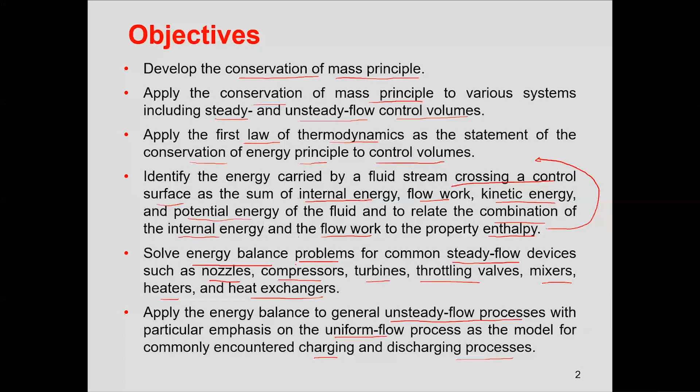So let's move on and try to understand the conservation of mass principle. It says that mass, like energy, is a conserved property. Just like energy, it cannot be created or destroyed.

Mass is a conserved property. We'll see the specific case where we see interrelationship of mass and energy, but this is the reality that mass, just like energy, is a conserved property. For closed systems, you are not interested in mass balance.

Before that, it says that if you have 2 kgs of hydrogen and 16 kg of oxygen gas and they react together to form water, they will form water having a specific weight of 18 kgs. It is not possible that you react 2 kg of hydrogen with 16 kg of oxygen and end up having 20 kg of water, or rather 15 kg or 13 kg of water.

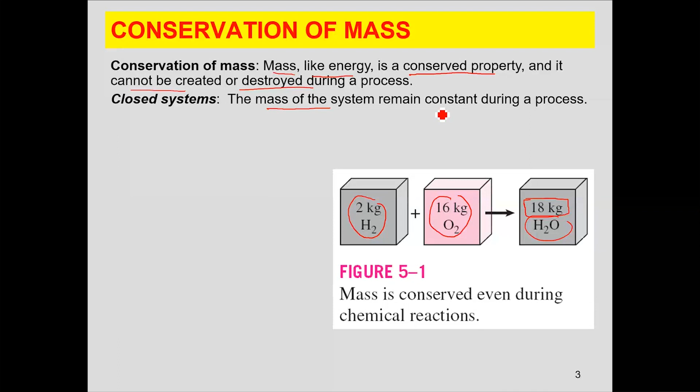Rather, there is a sense of mass balance associated with the process. You cannot have a process with mass being destroyed or created, unless there are some other reactions. I'll come to that in a minute's time. Specific reactions. So for a closed system, again, we are not interested in the mass balance because the mass of the system essentially remains constant during the process. So mass balance equation is not an issue.

Excuse me. So a mass balance equation is not a problem for closed systems, since the mass essentially remains constant. For open systems or control volumes, mass can cross the boundaries, and therefore we must keep track of the amount of mass that is entering or leaving the control volume. That would determine how much mass gets associated with the control volume.

The all-time famous equation that relates mass and energy is E equals mc squared, where energy is related to mass as a product of the square of the speed of light, which is roughly 3 into 10 to the power 8. This equation, where mass is converting into energy, is more often used with nuclear reactions where the smallest change in mass could result in a tremendous amount of energy, since it is multiplied by the square of 3 into 10 raised to power 8. So you know how big the value of energy could become for a small change in mass.

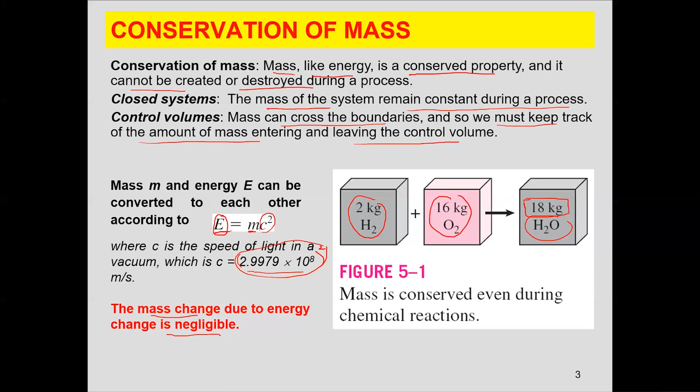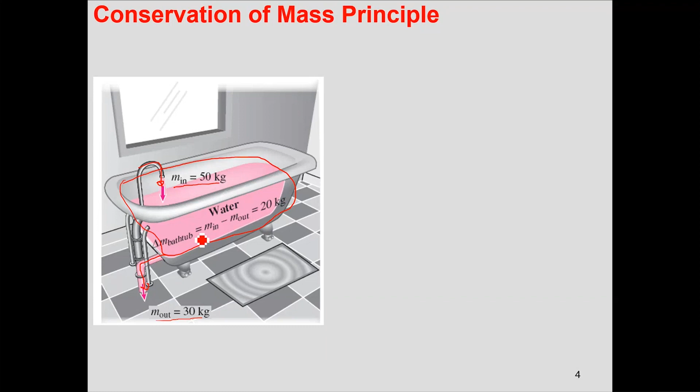The conservation of mass principle: if you have this bathtub as your control volume, and you have mass flowing into the system, and there is a drain where the mass is flowing out of the system. So the mass coming into the system is 50 kgs and the mass moving out of the system is 30 kgs. As a result, some mass is stored within this control volume, and the change in mass of the bathtub would be equal to mass coming in minus mass going out, which is 20 kgs.

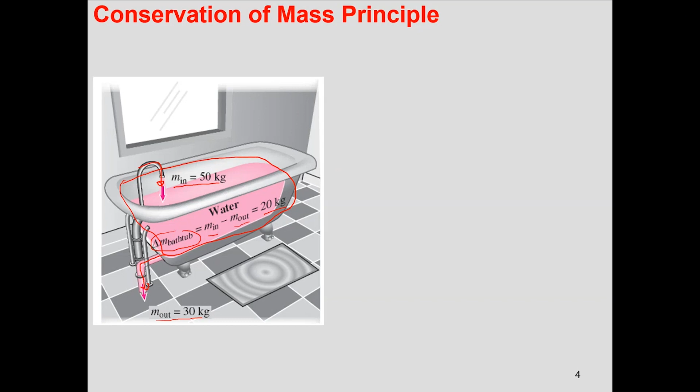But this information is not enough for me. It is essential that I am aware of the time for which this process has taken place. So the conservation of mass principle says that total mass entering the control volume during the time delta t, minus the total mass leaving the control volume during the same time interval, is equal to the net change in mass of the control volume for that time interval. So you cannot just write that total mass entering minus total mass leaving is equal to net change of the mass.

You have to specify the time for which that mass has been provided to the control volume, or the time for which the mass has been leaving the control volume. Again, the conservation of mass principle: the net mass transfer to or from a control volume during a time interval delta t is equal to the net change, increase or decrease, in the total mass of the control volume during delta t. Mathematically, mass in minus mass out is equivalent to the change in mass of the control volume. Now, this change in mass of control volume refers to the difference between the final and initial mass.

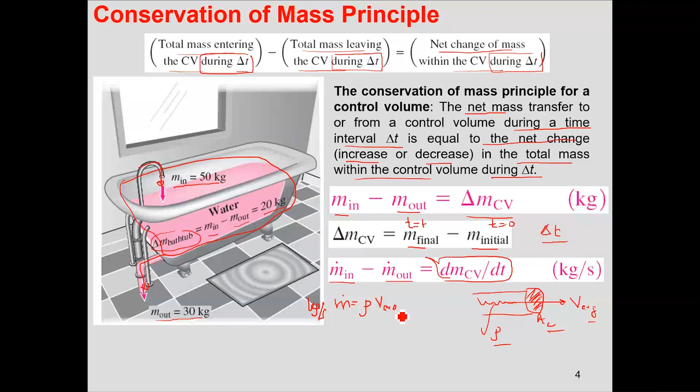Kgs per second. Mass flow rate is essentially equal to density multiplied by the average velocity, multiplied by the cross-sectional area. If you look at the units, this is kg per meter cube multiplied by meter per second multiplied by meter square. These cancel out, and you'll essentially have kgs per second as the mass flow rate. Is it clear? Yes, sir.

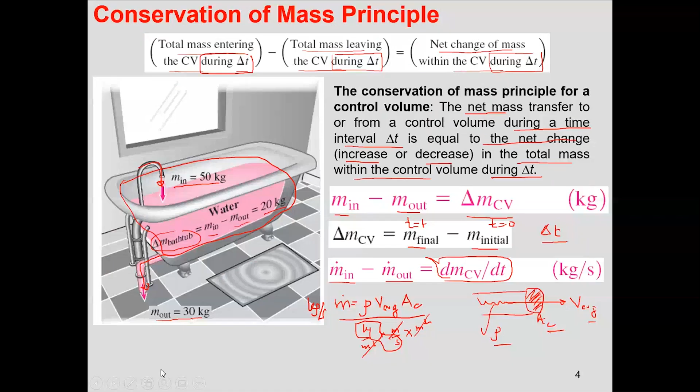Okay. The important thing is that mass flow rate is equal to rho V average AC, the cross-sectional area through which the fluid is flowing. From your knowledge of fluid mechanics, you must know that when a fluid is flowing within an enclosed tube, at the periphery, at the interface, the velocity is essentially zero, and the velocity is maximum at the center. So you have this sort of velocity profile in a fluid at no slip

condition. So in such a case, you take the average velocity, which represents the complete velocity of the fluid. That is the average of the maximum and zero. This is V average. Now, this is the mass flow rate equation, where mass flow rate is density into V average into AC. Do you know what this term V average into cross-sectional area is? Volume flow rate. Very good. So this is essentially volume flow rate, which is meter cube per second.

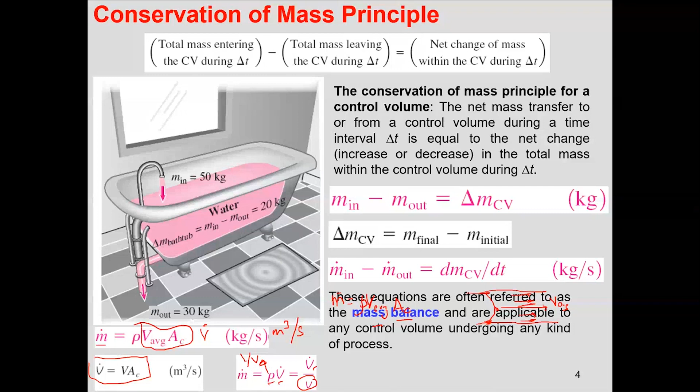So since you have this as the volume flow rate, you can write your mass flow rate as density multiplied by the volume flow rate, or volume flow rate divided by the specific volume, because density is 1 over specific volume. I hope it is clear so far. Yes, sir. All right.

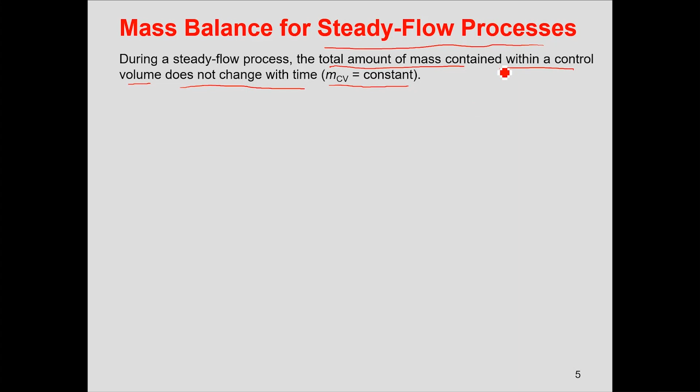Now, mass balance for steady flow processes. In steady flow processes, the total amount of mass contained within the control volume does not change with time. So the mass of the control volume is constant. Within the given space, the mass of the control volume is constant. That is a steady flow process.

If the mass of the control volume remains constant with regards to time, the conservation of mass principle requires that the total amount of mass entering the control volume should be equal to the total amount of mass leaving the control volume. Is it clear? So for steady flow processes, we are interested in the amount of mass flowing per unit time. That is the mass flow rate.

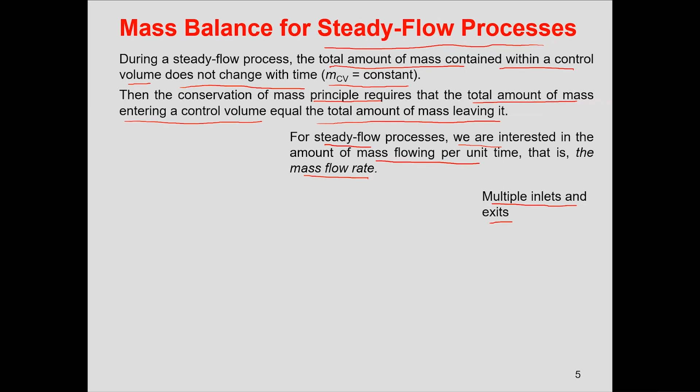And where you have multiple inlets and exits to the system, if the control volume mass is not changing with regards to time, the summation of all the mass flow rates into the system is equal to the summation of all the mass flow rates out of the system, since the mass is not changing.

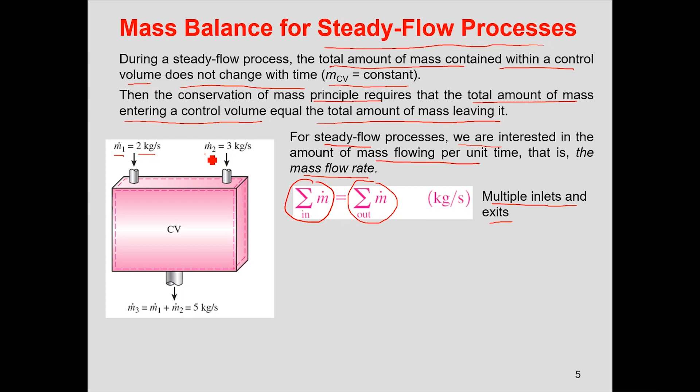The interpretation is this: if you have an inlet through which 2 kg per second, the first inlet is where the fluid is coming into the control volume at the rate of 2 kg per second, and the second inlet is where the fluid is coming into the control volume at the rate of 3 kg per second. If the mass of the control volume is not changing with regard to time, that means whatever is coming into the system at whatever rate, it should exit the control volume at the same rate. So the total mass flow rate at the outlet would essentially be mass flow rate 1 plus mass flow rate 2, which is essentially equal to 5 kg per second.

Is this clear to you? Yes, sir. All right.

Now, most of the engineering devices that you'll encounter, whether it's a turbine, compressor, nozzle or diffuser, normally are single stream devices. That means they have one inlet and one exit. In such a case, the mass flowing into the system at the inlet is essentially equal to the mass flowing out of the system. Or in other words, the product of rho, velocity and area at the inlet should be equal to the product of these three properties at the exit. I hope this is clear.

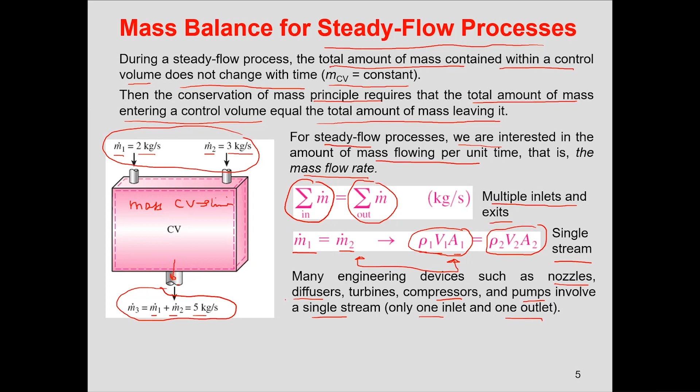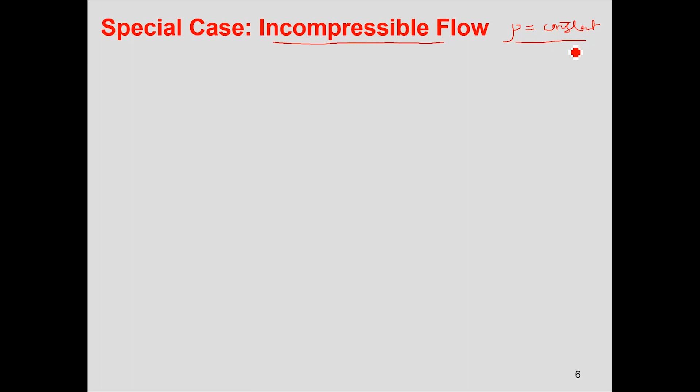Yes, sir. As it is mentioned, many engineering devices such as nozzles, diffusers, turbines, compressors, pumps involve a single stream, one inlet, one outlet. So they basically follow these two equations for steady flow process, since we have dedicated this slide to steady flow process. A special case of a steady flow process is incompressible flow. Incompressible flow is a flow where your density is essentially constant. Incompressible substances are those where density essentially remains constant; it does not change with the process. And this is specifically directed to the case of liquids. Liquids are normally incompressible. Their density does not change with the process.

Ji, is there any question? Can you turn off your mic, please? All right. Saad, kindly have your mic turned off, please.

Anyways, for the case of liquids, which are incompressible substances, density is essentially constant. If you have a steady incompressible flow, the summation of mass flow rate into the system is equal to the summation of mass flow rate out of the system. This is the mass balance equation for a steady state process. If I have a single inlet and single outlet, I would write it as mass flow rate into the system is equivalent to mass flow rate out of the system.

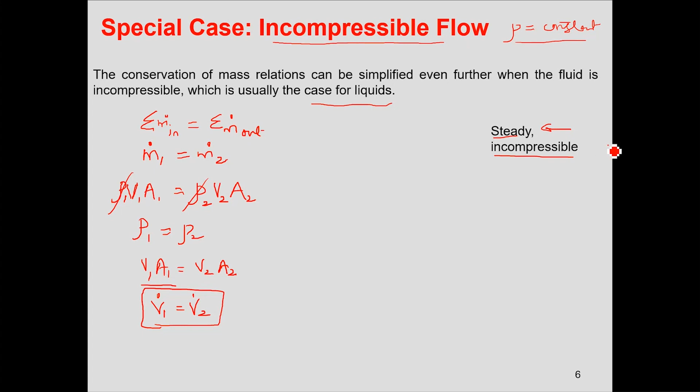And I can further write it as: the product of density at inlet, average velocity at inlet, and cross-sectional area at inlet is equal to density at outlet, velocity at outlet, and cross-sectional area at the outlet. Now, if your density is constant, rho 1 is essentially equal to rho 2. These two cancel out, and you have V1A1 equals V2A2. That means the volume flow rate at 1 is equal to the volume flow rate at 2. This is the equation you develop if you have steady state flow and an incompressible substance.

Now, for steady state incompressible flow, the volume flow rate into the system is essentially equal to the volume flow rate out of the system. Or for single stream, as I mentioned, you can write volume flow rate at the inlet V dot 1 is equal to volume flow rate at the exit, V dot 2, or V1A1 is equal to V2A2.

Now, this does not mean that volume is a conserved property. There is no such thing as the conservation of volume principle. This conservation is essentially related to the flow of liquids. In flow of liquids, which are incompressible, the volume flow rates and the mass flow rates remain constant. And it is essential that you are referring to steady state flow and an incompressible substance. No such thing as conservation of volume principle.

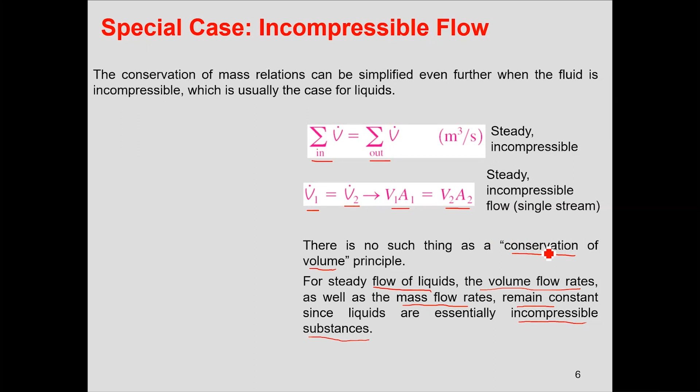Let us have a look at an example. Say you have an air compressor with steady state flow, one inlet and one outlet. So your mass flow rate at the inlet is essentially equal to the mass flow rate at the outlet. This is governed by the steady flow. Now, in an air compressor, the density at the inlet would be less compared to the density at the outlet.

So your density 1 should be less than density 2. The air compressor would compress the air and increase the density. In such a case, if I write the equation in this form, m-dot 1 is essentially equal to rho 1 V1 A1, which is essentially equal to rho 2 V2 A2. This equation is balanced and this is correct.

But if I combine these two terms together, this is essentially volume flow rate. And if I combine these two terms together, this is essentially volume flow rate at the exit. If densities are not the same, if density 1 is less than density 2, let's say density 1 is 5 and density 2 is 10, the volume flow rate cannot be the same.

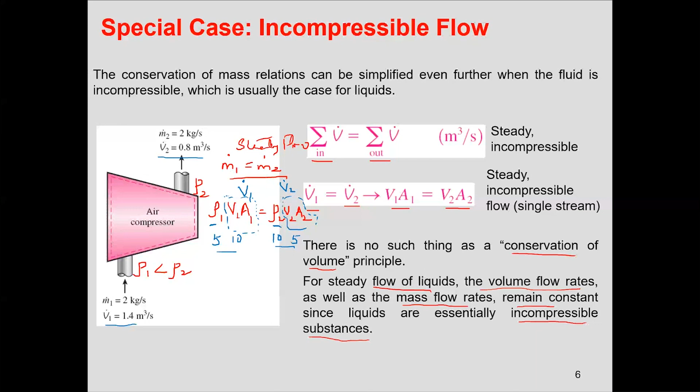All right. Now we'll be looking into one more thing which we have already looked at, since we are moving towards the energy balance equation, or the energy equation for open systems. I would like to recall the energy associated with the flowing fluid. You have seen this schematic a couple of times before, but I'll recall it again so that we get familiar with it.

If you have this control volume, and there is a small chunk of element that has to get into this control volume. Let us have a look at it over here. This element has a volume V and pressure P, and it has to move into the control volume. That means the fluid behind it has to apply a certain force so that this chunk moves into the control volume.

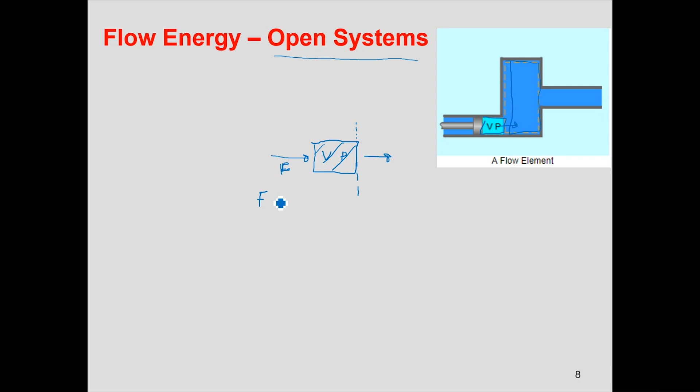The resistance to the flow is caused by the pressure of this chunk. And in order to overcome the pressure of this flow element, the force that needs to be applied by the fluid at its rear is essentially pressure multiplied by the cross-sectional area, where this is the cross-sectional area of the element.

If this is the force being applied to move this small chunk into the control volume, and we have to calculate the work done associated with this force, this whole volume has to cover the length L. So the force has to be applied over a length L so that this chunk moves into the control volume and the flow continues.

To calculate the work done associated with this flow, or to keep this flow going, work done is essentially force multiplied by the length over which that force is applied so that the small element moves into the control volume. Force into length is pressure into area multiplied by length, and area into length is the volume. So PV is the work done associated with the movement of this fluid into the control volume, to keep the flow moving.

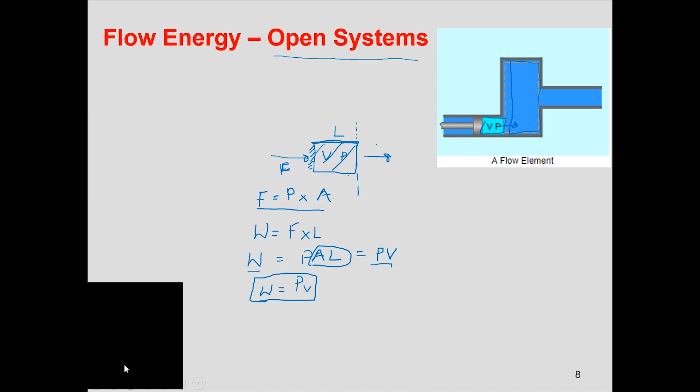And if we are talking about the specific work done, it is essentially pressure multiplied by the specific volume. This is the flow energy associated with the continuous movement of fluid into the control volume. I hope this is clear to you. I'll again show you the process.

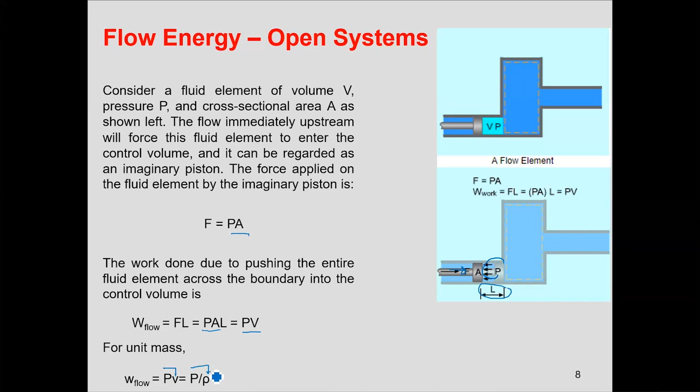So this force is equivalent to pressure into area, and this pressure into area is basically the resistance, against which the fluid applies the force for a length of L. So your flow work essentially becomes PAL, or P into volume. And if you want to express it per unit mass, you express it as P into specific volume, or pressure divided by the density. This is the flow energy associated with the control volume.

I'll hold on at this moment, and we'll move on and see how we can differentiate the flow in open systems and closed systems, or how we can differentiate the flow energy, and try to develop an energy balance equation in our upcoming class.